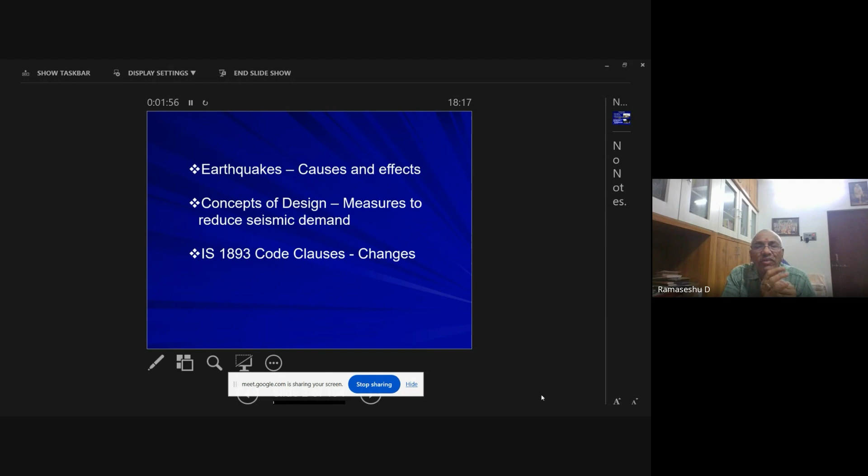So in this lecture, I am going to talk about earthquakes, their causes and effects, and some of the concepts of design, and what are the different measures to reduce the seismic demand. And also IS 1893's clauses.

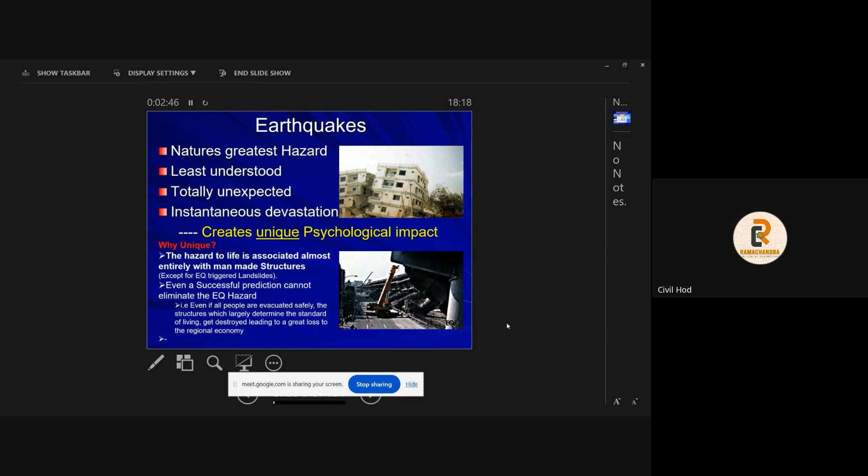Now let us see what earthquakes are. Earthquakes are nature's greatest hazard and also least understood, totally unexpected, instantaneous. They cause instantaneous devastation. Because of this they are unique, they present a unique situation, and in that sense they create a unique psychological impact. So why are these earthquakes unique, first of all?

First thing is, suppose if you are standing in an open area, you don't feel an earthquake. You may feel some earthquake, but no damage will be there. But if you are in the midst of buildings, etc., man-made construction, definitely there is going to be havoc in that particular region because of the earthquake. So that is why the hazard to life is almost associated entirely with man-made structures.

Even a successful prediction cannot eliminate the earthquake hazard. Suppose if you are able to predict the earthquake occurrence, even then it will not be able to eliminate the hazard, because even if all the people are evacuated safely, the structures which largely determine the standard of living get destroyed, leading to great loss to the national or regional economy. So that is why they are unique.

Now, if you look at small mythological aspects, there are 5 natural disasters in general. They cause devastating effects, they are the forces of nature. For example, Prithvi - we see earthquakes and landslides associated with this. Then tsunami and floods are associated with Jal. Similarly, Agni causes fire and volcanic eruptions. Vayu creates cyclones and hurricanes. Akash, lightning affects it. So all these disasters will have a profound environmental effect and human loss, and frequently incur financial loss.

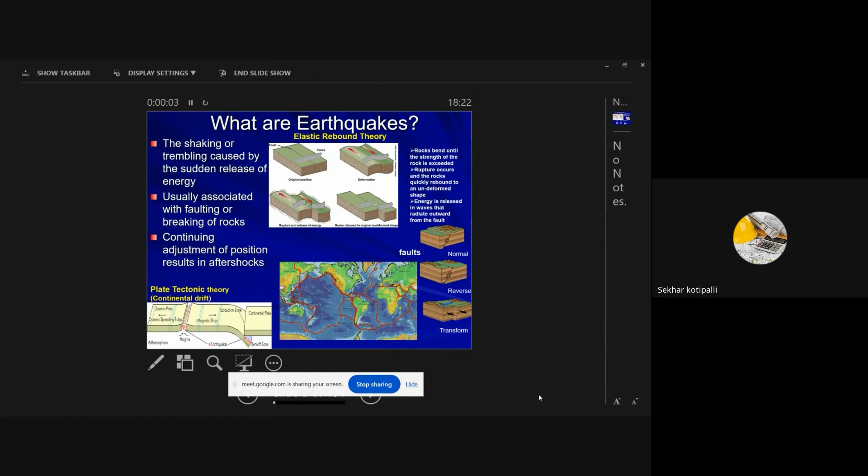As per the elastic rebound theory, these rock masses, when they break, release a large amount of energy. That energy is converted and shows up as an earthquake. So this is what the elastic rebound theory says. This may happen either due to faults or different types of natural elements in the earth.

There is another theory which is the plate tectonic theory. The entire earth is composed of different plates. It's not a continuous mass. The earth's crust is not a continuous mass; it consists of different plates. All these plates move relative to each other and try to collide with each other.

For example, India is part of the Indo-Australian plate, which tries to collide with the Eurasian plate. At that boundary where the Himalayas exist, the plates continuously collide with each other, so there is a possibility of a large number of earthquakes in that region. These are the different theories: elastic rebound theory and plate tectonic theory, also called continental drift.

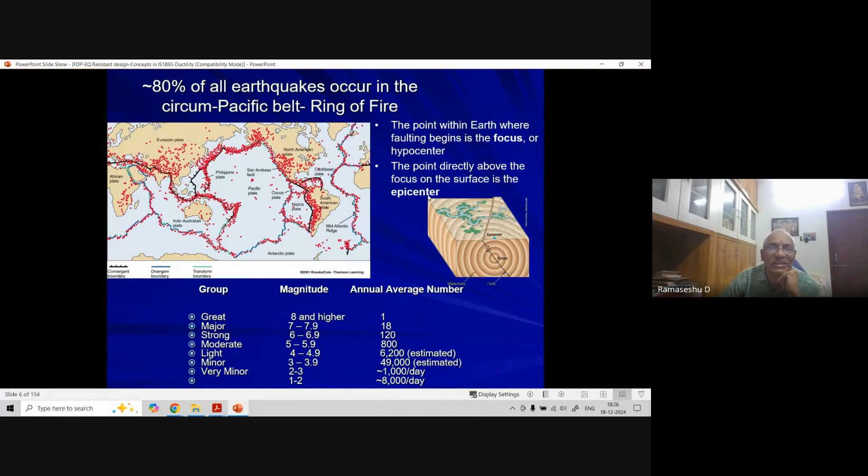Now let us see some terminology with respect to earthquakes. The terminologies are focus point and epicenter point. The focus point, or hypocenter, is the point within the earth where the faulting begins, where the disturbance actually occurs. The point directly above this focus on the surface is the epicenter. These are the general terminologies we are all aware of.

Whenever there is a disturbance at the focus point, seismic waves get generated, and these seismic waves travel long distances. There are 4 types of seismic waves: the primary wave, the secondary wave, the Love wave, and the Rayleigh wave.

The P waves, the primary waves, travel with the velocity of sound, almost 330 meters per second in air, whereas 1450 meters per second in water, and about 5000 meters per second in rocks like granite. These P waves are push and pull waves.

Secondary waves have nearly half the speed of the primary wave. That is, if the primary wave is 300 meters per second, the secondary wave will be around 150 meters per second. These secondary waves cause side-to-side movement, whereas the primary waves cause push and pull type movement.

Coming to the Love waves, they travel sideways in a horizontal plane and cause a lot of disturbance. Similarly, Rayleigh waves are elliptic or vertical, meaning some kind of circular movement takes place. Of all these primary, secondary, Love, and Rayleigh waves, the Love and Rayleigh waves cause a lot of disturbance compared to the primary and secondary waves. Primary waves cause little disturbance, but secondary waves cause a little higher disturbance.

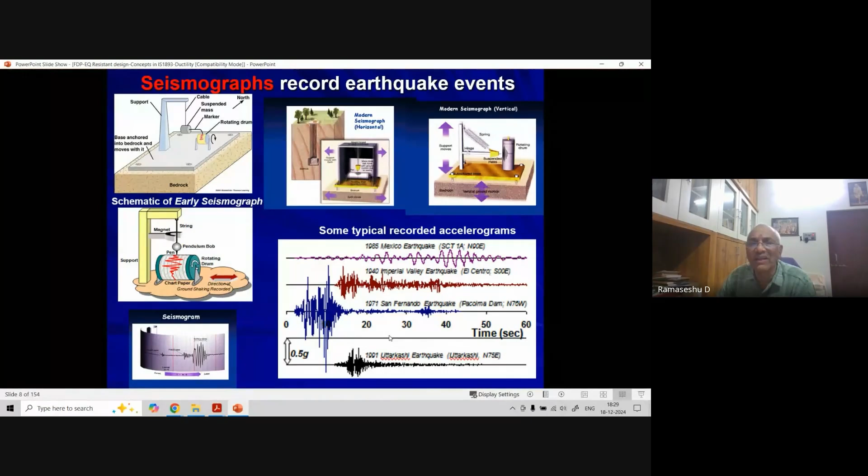Now coming to how an earthquake's epicenter is located. Suppose there is an earthquake, how are people able to locate where its epicenter is? From the seismic record, what we get is the time of arrival. Primary waves travel very fast and reach a particular point before the other waves, causing a small disturbance. Let us say that is time t1.

Then sometime later, the secondary waves arrive at that same point because they travel at a lesser speed. Let us say that is time t2. So there is a difference between these two times, t2 minus t1. If you know this gap in seconds, you can find out the distance of the focus point or epicenter.

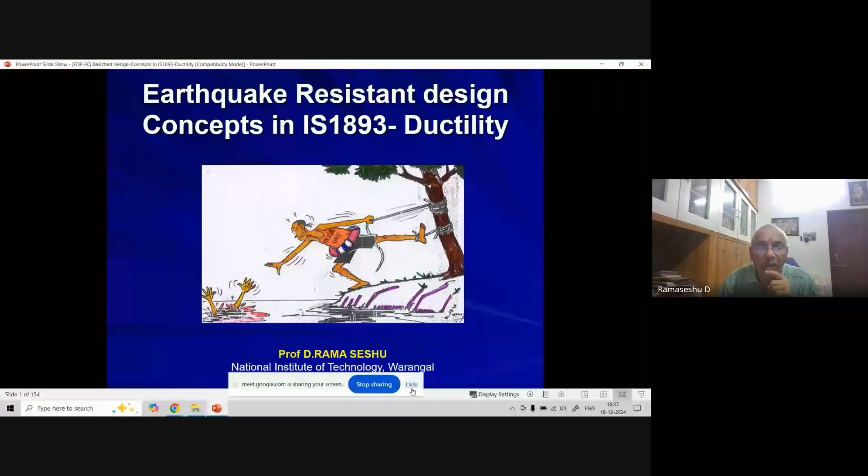Okay, are you able to see this? Yes, sir. Continue, sir. Right, okay, there was a power disturbance. Okay, right, now let us see.

There are two ways of measuring an earthquake: the intensity and the magnitude. Intensity is a qualitative measurement of an earthquake, while the magnitude gives the exact quantitative measurement. Qualitative means the amount of disturbance it causes, which determines the intensity. The magnitude is generally the same for an earthquake event at all points, whereas the intensity differs depending on the devastation or disturbance it causes.

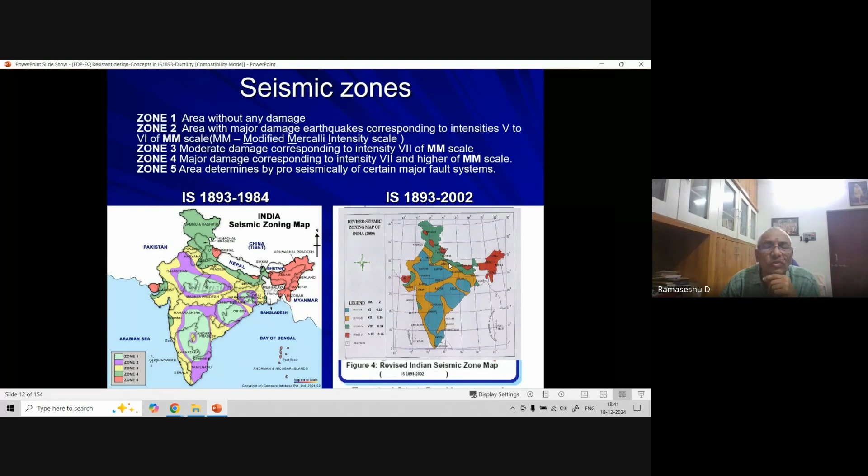Now let us see the concept of earthquake forces. Any building will have mass as well as stiffness. There is a time period related to both mass and stiffness, given by 2 pi times the square root of m by k.

If a building has lower stiffness, meaning it is flexible, the k value is smaller; tall buildings normally have smaller stiffness values. Smaller stiffness means the time period will be very large, so tall structures are longer period structures. Whereas shorter structures have more stiffness; even if the mass is more, smaller structures will have a smaller time period.

So this is the way we can understand in general the time period of the buildings. This time period is very important, because the time period is the one which decides the magnitude of the intensity of the earthquake forces.

Because we are going to use a particular graph given in IS 1893, the graph between spectral acceleration versus time period. The time period is, let us say, 0.5 seconds for a particular building. It experiences maximum spectral acceleration, almost SA by G is 2.5. What is this SA by G? The acceleration is 2.5 times the acceleration due to gravity, 2.5 G.

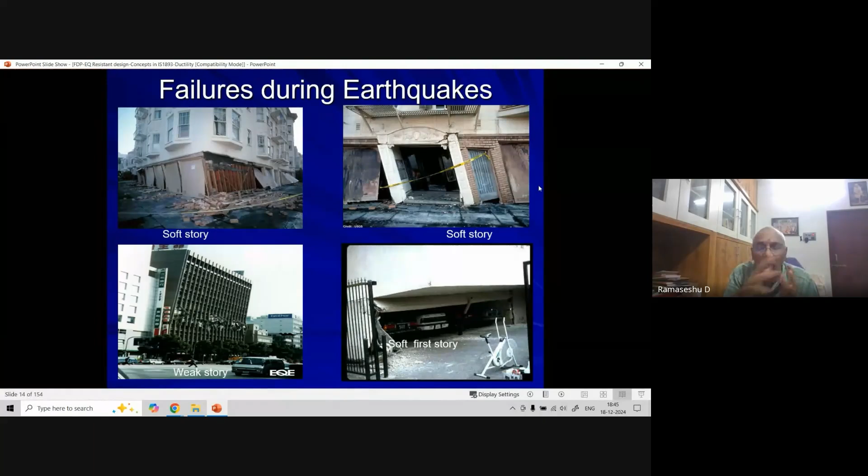We will come to this aspect. Similarly, some more failures: the building can move off the foundation, which causes failure, and columns may fail, and bending of these columns will take place.

Similarly, because of the high center of mass, there is a possibility resonance may occur. Resonance occurring means a lot of damage is going to occur. Resonance means the time period of the building matching with the period of the earthquake waves. Whenever there is a matching of these things, a lot of amplitude will take place, and because of this, a lot of disturbance will take place.

During the earthquake there can be falling objects, and coming to ground failures, there can be liquefaction. Liquefaction means almost the foundation soil behaves as if it is a liquid, so it doesn't have any shear carrying capacity, and the building will sink. That is the liquefaction effect.

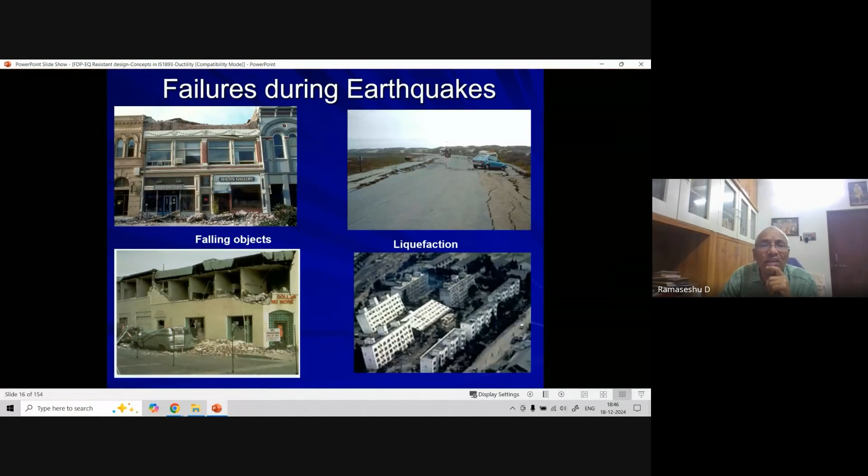There can be overturning effects, opening of faults, and damages to canal structures. There can be different types of failures: bridge failures, pipelines crossing the fault getting damaged, etc.

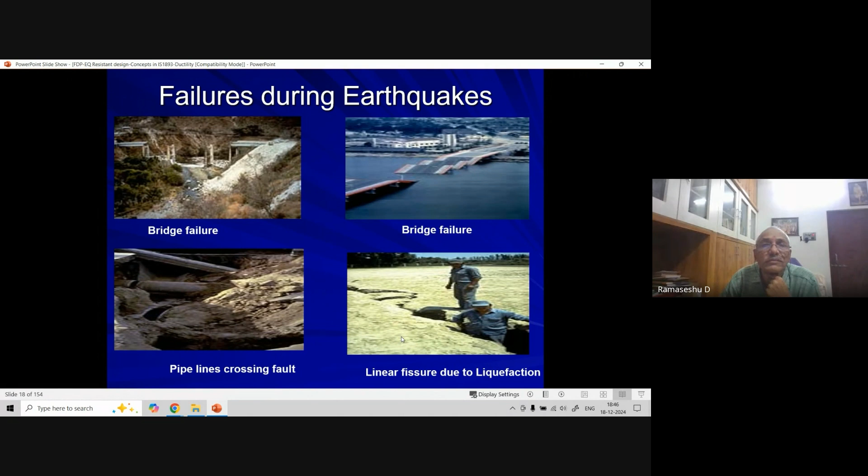Similarly, damage to tanks, RC staging, steel staging, or whatever. RC cantilever slabs in particular are the first elements to fail under earthquake forces, because in an earthquake event, if the amplitude of a normal frame is some x, the cantilevers will experience 3 to 4 times that amplitude. That is why they are the ones that fail faster.

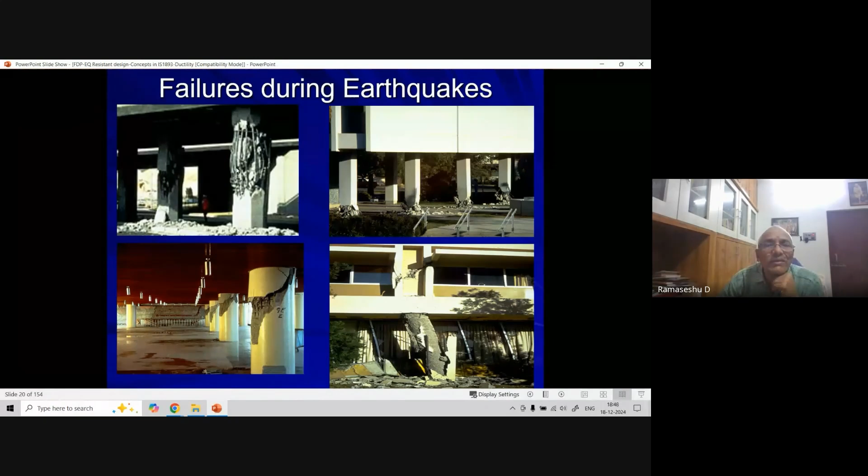Here in the first picture you can see the lateral ties, but you are not able to see any lateral ties actually; all these lateral ties got opened up, so there is no tying of the main bars because of the opening of the ties. We normally call that a confinement failure, meaning there is no confinement to the core concrete, which causes the failure. We'll discuss this confinement later.

Particularly unreinforced buildings, unreinforced masonry structures, suffer a lot. For example, infill walls or even brick masonry walls are subjected to crisscross cracking, meaning two types of cracking occur because of the cyclic movements of the ground or shaking.

Okay, so those are all some of the photographs which indicate how the failures will take place, etc.

Now coming to the concepts of design. Here the concept is very simple: the capacity shall be greater than demand. Capacity means the building capacity, whether from a stiffness point of view or strength point of view, which has to be greater than the demand. Demand means whatever earthquake forces that come. So if the capacity of the building is more than the induced earthquake forces, then the building survives. That is the concept.

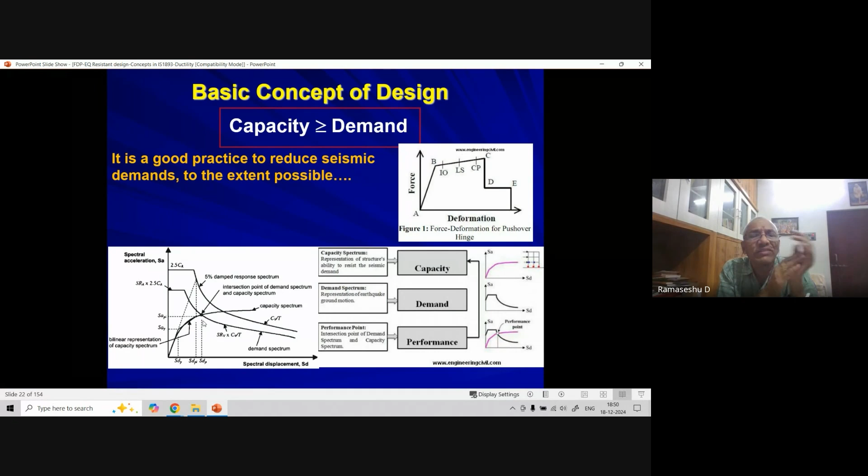So now, how to achieve these things? It's good practice to reduce the seismic demand to the extent possible. This can be done at the conceptual stage by selecting a suitable structural system. Now I am going to discuss certain measures that can reduce the seismic demand so that the structures get protected.

Here I have listed a few measures which reduce the seismic demand, starting from selecting a suitable site with favorable soil conditions, or avoiding unnecessary mass, etc. We'll discuss one by one. The first one is selecting a suitable site with favorable conditions. For example, if the selected site consists of soft soil, that means the bearing capacity is very low.

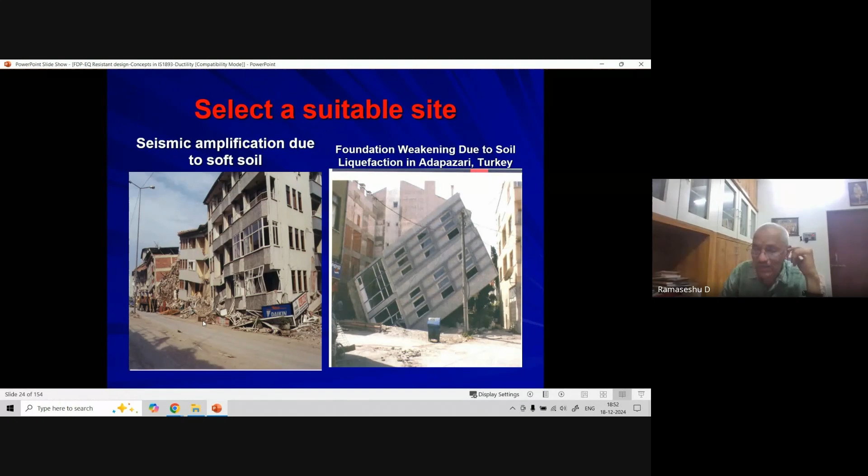The problem is whenever seismic waves travel through soft soil, they get amplified - meaning the magnitude of the displacement gets amplified. That causes a lot of disturbance to structures existing in that region, and there is a possibility of liquefaction. Liquefaction occurs wherever there is vibration or sudden movement of soil grains - they lose their one-to-one attachment and behave as if they are liquid, losing all shear strength. This causes severe settlement of the building, etc.

So selecting a suitable site is very important from the point of view of earthquakes, as they can cause overturning or failure of mat foundations. These are all the reasons for a weak site, or a site having less bearing capacity, etc. - soft soils, for example.

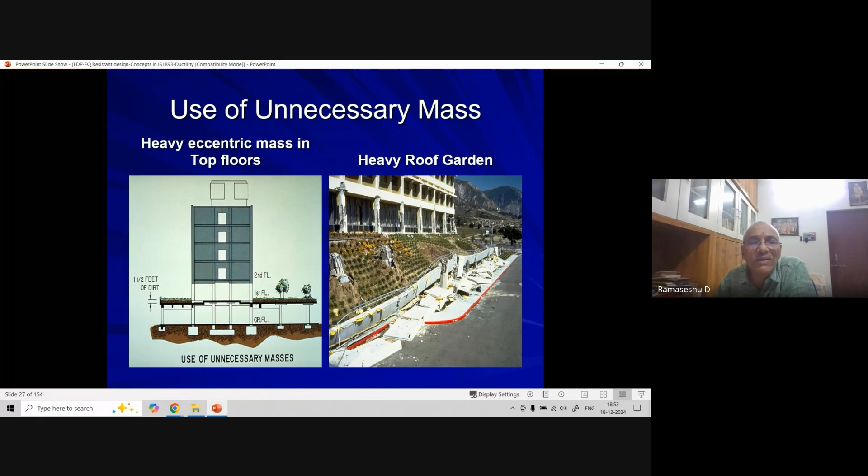Then another aspect, apart from selecting a suitable site, is to avoid using unnecessary mass. For example, you should not have a plan of the building such that there is a heavy eccentric mass located in the top floors, whereas lightweight material is in the lower floors. That causes unnecessary mass placed at the very top, which leads to a lot of forces likely to act on the building and cause its failure. Here you can see a building where, in the first floor, they had a heavy mass - a heavy roof garden was there. So in the event of an earthquake, the floor got damaged. So you should not keep unnecessary heavy mass.

Then, apart from selecting suitable soil and avoiding unnecessary mass, there is a third point: use a simple structural layout with minimum torsional effect. Simple structural layout means it should be rectangular, square, or something like that. Wherever L-shaped buildings exist, you should give a joint between the two parts so that they act independently, as independent rectangles. That is a simple structural layout. Why simple structural layout? Because wherever there is irregularity, either in the plan or in the elevation, it unnecessarily causes torsion of the building - meaning instead of simply moving in the lateral direction, the building will turn like this.

So that causes torsional irregularity. That should not happen actually.

Another thing is avoid strength and stiffness taper along the height. What is the meaning of this? There should not be much difference in strength between adjacent floors. Suppose one floor has lateral strength X, the immediate adjacent floor should have the same strength. It should not have a strength much less than this. Similarly with respect to stiffness also.

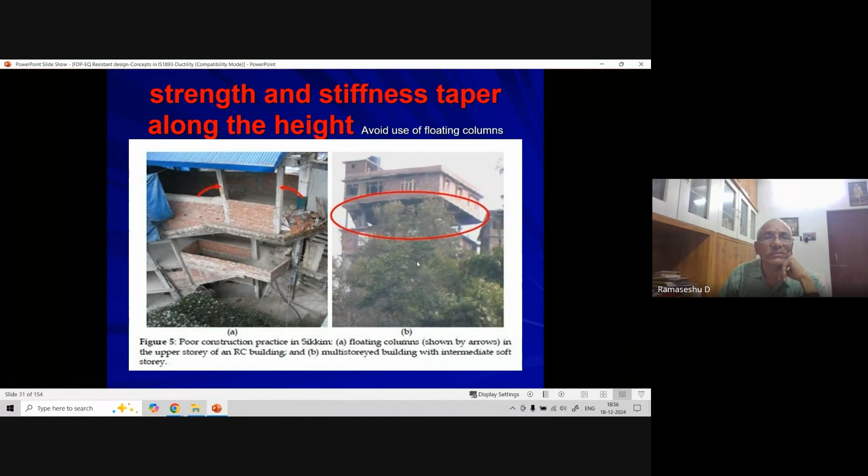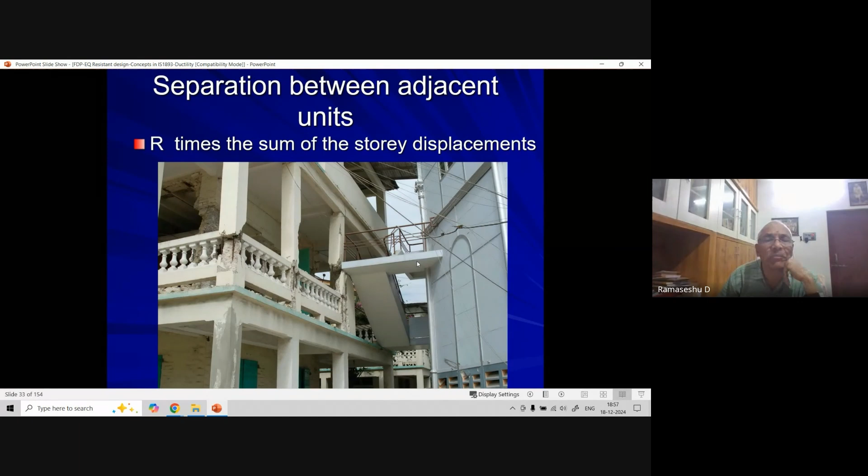That is why the code says the minimum gap between the structures is R times the sum of the story displacement. R means the response reduction factor. That should be the minimum gap you have to maintain between the buildings in order to avoid the pounding effects.

Similarly, short columns. For example, you can see here the staircase, because of the landing slab, this column height reduces. So if the column height reduces, what will happen? Of course it has to be designed properly. The reduced column height means the short column will have higher stiffness actually.

Higher stiffness columns attract more seismic forces, so they have to be designed accordingly. Any rigid element will attract more forces. That is a general principle - any rigid or stiffer elements will attract more forces from earthquakes.

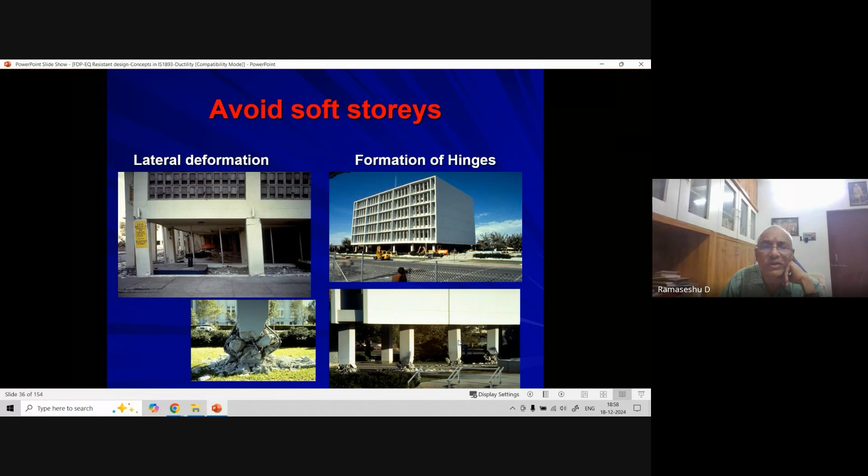Now coming to avoiding the soft stories. You have to avoid the soft stories. Soft stories cause lateral deformation, and there is a possibility of formation of hinges in the soft stories, which causes a lot of damage to the columns etc. Here you can see that particular building wherein a series of columns got damaged. This is another failure, soft story failure.

As far as possible we have to avoid soft stories, or if the soft story becomes essential because of parking purposes and we need to keep the ground floor without constructing any brick wall, in such case at least we have to take care by providing bracings or shear walls etc. We shall see this in the presentation later.

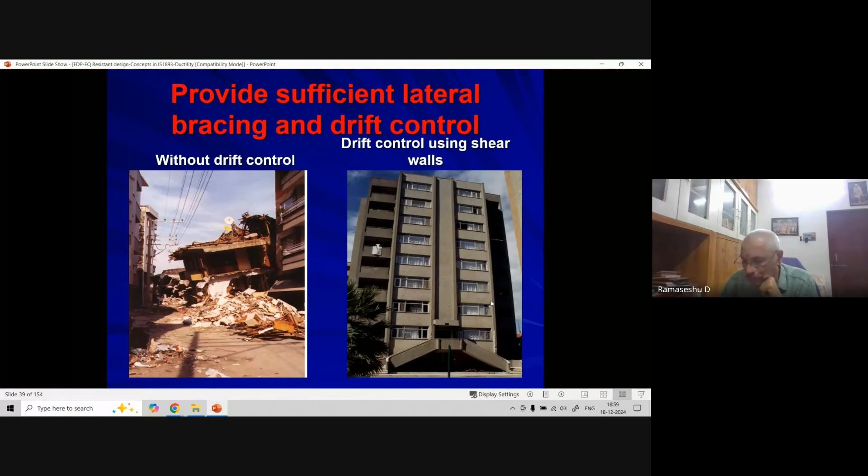Similarly, isolate the non-structural elements. Whenever non-structural elements are present, they are going to get damaged. Whenever there is lateral movement, non-structural walls, infill walls etc. get damaged heavily. That's why you have to have a separation between these non-structural and structural elements in order to avoid the damages. These are all certain measures.

So far, we have discussed certain measures that have to be taken to avoid the seismic demand, to reduce the seismic demand actually.

Now coming to the seismic design requirement, nowadays we are following the capacity design method. What is this capacity design? In this method, certain selected elements of a structure, either beam or column, at critical places, critical elements, are designed in such a way that they remain elastic, whereas the other parts of the beams go into the plastic regions. So that is the general principle of capacity design.

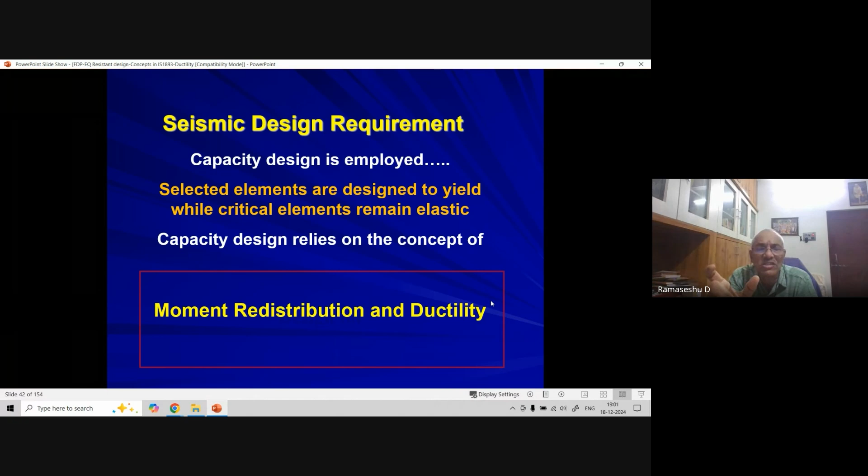But this capacity design heavily relies on the concept of moment redistribution and ductility concept. Now let us see what is this moment redistribution.

This is a very important concept in the design of structures, moment redistribution. Normally if you analyze a frame, let us say a beam, under linear response conditions, it shows up some bending moment diagram.

But what happens if you go on increasing the load to ultimate? The beam will act such that there is a possibility of hinges taking place. Plastic hinges will take place because of the non-linear stress strain behavior of the constituent materials. Because of this, plastic hinges may take place at certain locations, not all locations.

Now, the effect of this is that the formation of plastic hinges will transform an indeterminate structure towards the determinate. For example, a fixed beam subjected to UDL - if you keep increasing the UDL, the fixed supports will experience heavy bending moment. Whenever this bending moment reaches the capacity of that section, we call that the plastic moment, MP. After that, there is no increase in moment at that particular point.

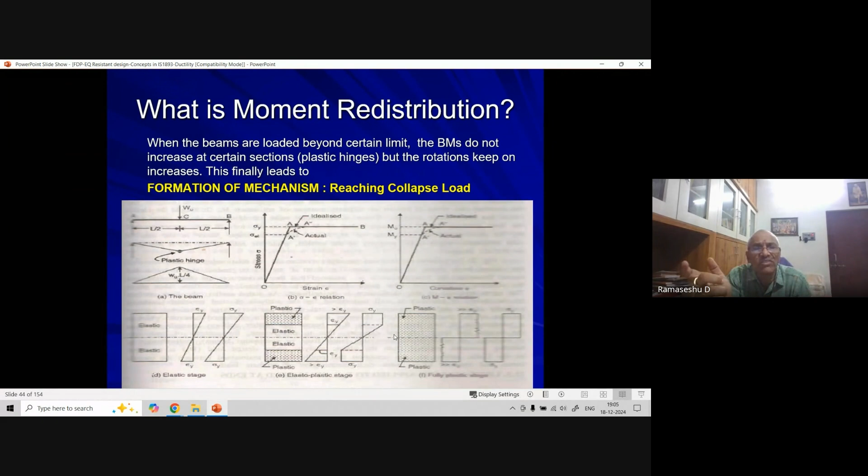This is called the redistribution of the moments. As far as redistribution of moments is concerned, the IS code has certain limitations. For example, if you see clause number 37.1.1, the neutral axis depth ratio x by d should be less than 0.6 minus delta m by 100.

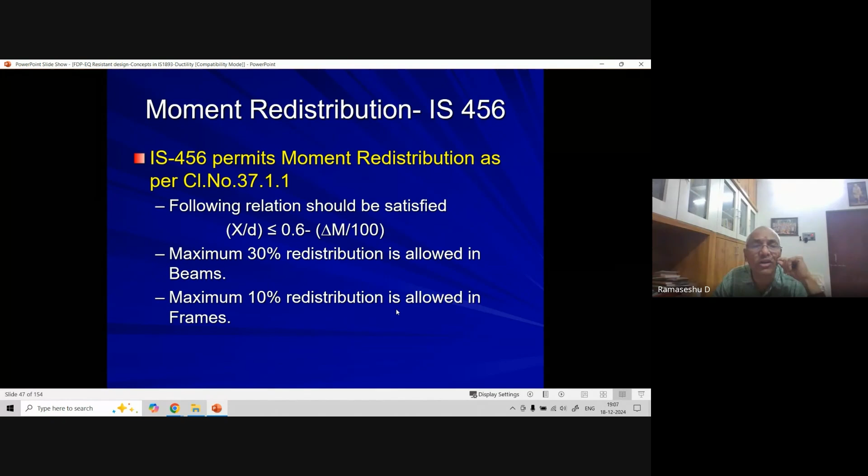Now coming to the limitations of moment redistribution, particularly with respect to RC sections. RC sections have a limited rotation capacity. How do we increase this rotation capacity in order to have more redistribution of moments? Rotation capacity depends upon ductility of RC sections. What is ductility? Let us see a few aspects of this ductility.

Before that, I have a small question. Suppose I ask you whether you want an earthquake resistant building or an earthquake proof building. What is the difference? Earthquake proof means no damage. But this concept is incorrect.

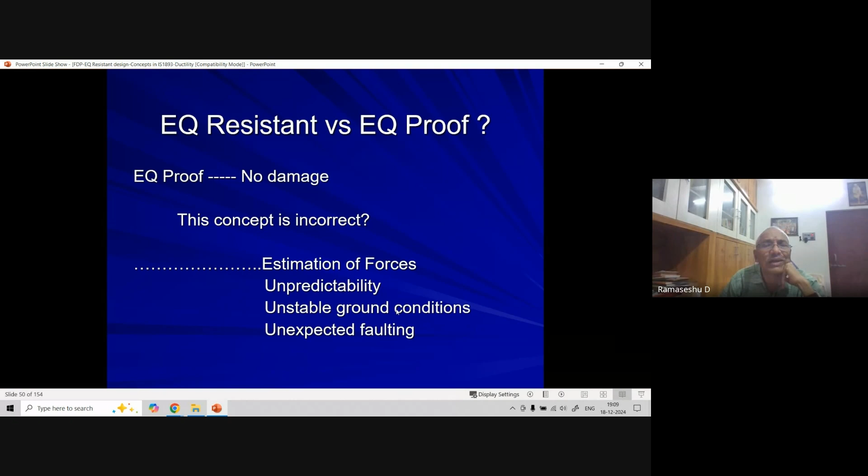Why is it incorrect? Because we cannot estimate the forces correctly. Nobody can predict exactly what earthquake force is likely to happen because of the uncertainty. Of course we have some methods to estimate the forces, but how far are these methods reliable? There is uncertainty in force estimation, unpredictability of earthquakes, unstable ground conditions, unexpected faulting of the ground, etc. All this gives an uncertain situation. That is why an earthquake proof building, one with no damage, is not possible, and it's not a correct concept. We have to accept some damage, meaning that in the event of an earthquake there will be some damage that needs to be corrected later. That is why the code suggests only earthquake resistant buildings, not earthquake proof buildings.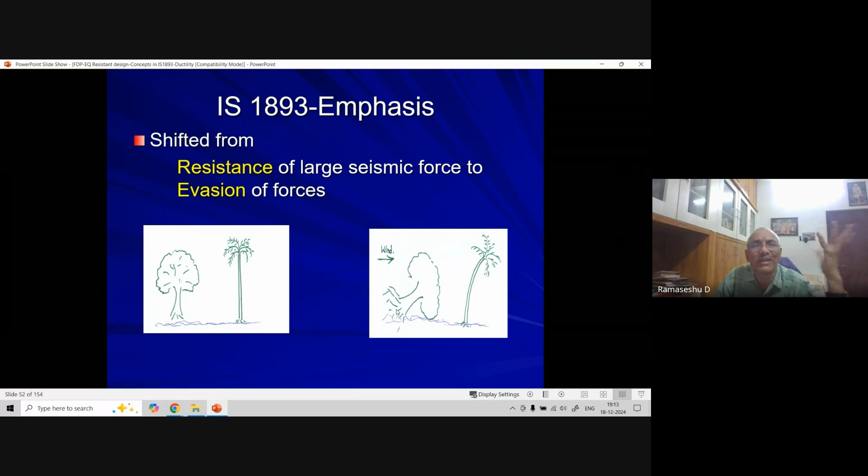Then how do we do this? The saying is very simple - instead of resisting, you evade the situation. But how to bring this concept into structures? We can introduce this by encouraging structural forms possessing ductility, not only strength but ductility. If the structure has ductility, under gravity loads it behaves as if rigid, but under extreme forces it behaves as if flexible. This is possible only when the structure has sufficient ductility.

What is this ductility? Before that, there are two distinct designs of buildings that result in different earthquake performances. One design goes for strong column, weak beam; another goes for weak column, strong beam. In case of strong column, weak beams, because the beams are weak, most plastic hinges form only in beams, not columns - only at the ground level is there a possibility of column hinges. Whereas in weak column, strong beams, there is no possibility of hinges in the beams - the hinges will form only in columns.

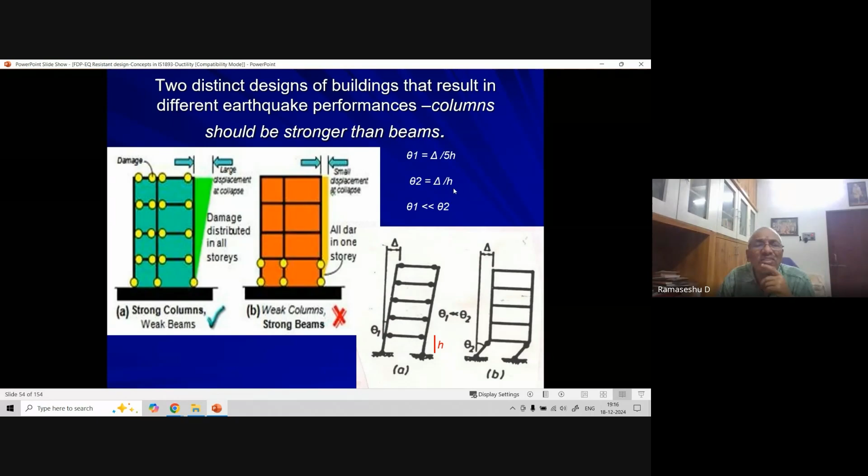Whereas in the second case, where weak column and strong beam is there, for the same delta, theta 2 simply becomes delta by h - meaning the denominator has reduced. In the first case it was the total height of the building, whereas in the second case it's only the floor height. So theta 2 will be much higher than theta 1, meaning the rotation capacity required in the second case is much higher. Since concrete cannot undergo that much rotation capacity, we prefer the first type of design - strong column, weak beam. This is the concept the code prefers.

Because of this, the code also prescribes certain performance objectives under different intensities of ground shaking. Performance objectives range from low repairable damage to collapse prevention. For example, in minor shaking there can be low repairable damage, whereas in strong shaking there can be heavy damage, but the structure should not collapse. These are the performance objectives the code prescribes.

For example, if there is an ordinary building, whenever there is a frequent earthquake, the ordinary building has to be operational - meaning it should not collapse. For example, if you see the rarest type of earthquakes, very heavy earthquakes, the ordinary building reaches the near-collapse region.

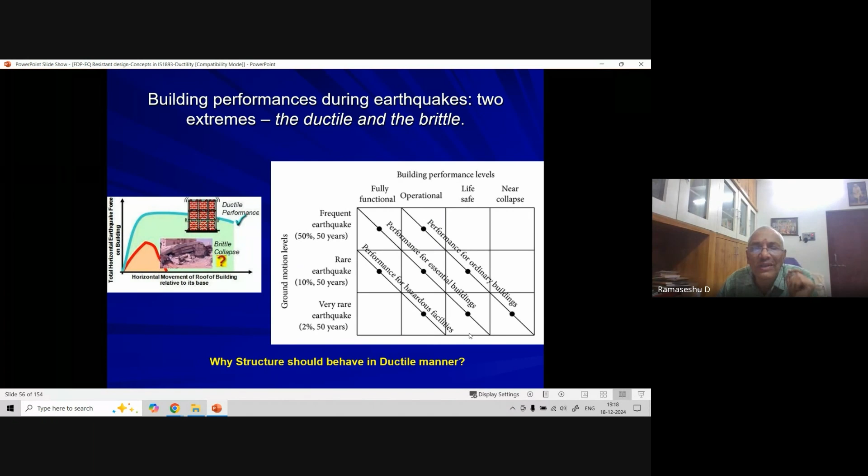This is the point, near collapse region. The performance for ordinary buildings transfers from operational performance level to that of near collapse region. Similarly, for hazardous facilities, meaning those whose failure causes a lot of havoc, we should not push such buildings till near collapse. These buildings should remain operational even in the event of rarest of rare earthquakes. That is the performance objective with which the buildings are designed. So to achieve these performance objectives, ductility is very essential.

Providing ductility in a structure - now let us see what ductility actually gives. Ductility assists the structure in providing robustness. Second, it gives warning of the incipient collapse. Third, it enables statically indeterminate structures to go into redistribution. Fourth, when there is ductility in a structure, it enables major distortions to be accommodated and most of the energy gets absorbed in the structure. This is the advantage of having ductility: robustness, warning, redistribution, and energy absorption. These are the four things ductility will provide.

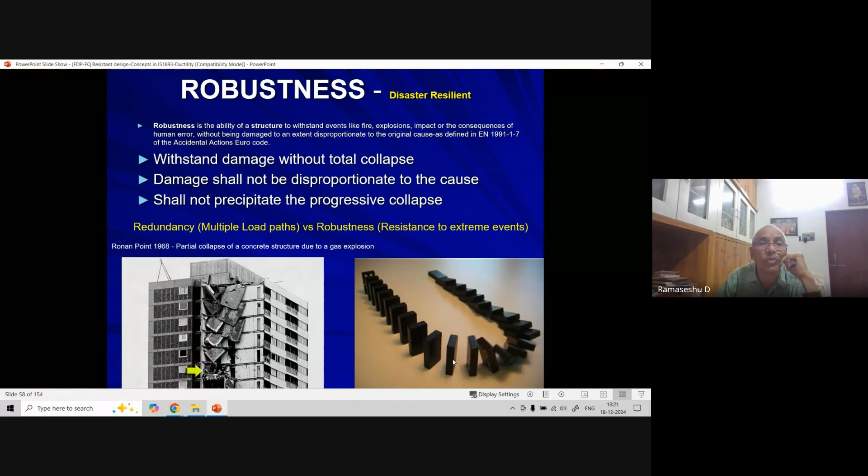If there are more alternate load paths available, then the structure is said to be more robust. For example, in our childhood days, we used to play by arranging matchboxes or a pack of cards like this. If you disturb one part, it causes the collapse of the entire system of the pack of cards - a small disturbance at one place causing the collapse of the entire system. That means such a system is not considered robust. So what we understand by robustness is that it should have different load paths, multiple load paths, redundancy in the structure.

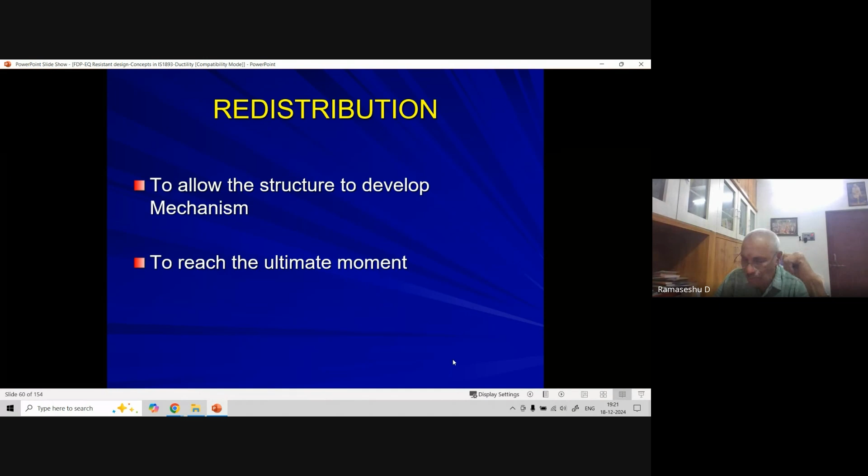Next is warning. This can occur in the form of development of cracks, crushing, etc. So this warning has to be there. Then similarly, redistribution - this is what we have discussed - allows the structure to develop the mechanism to reach the ultimate moment. Before reaching the mechanism, it should not collapse. Then energy absorption is the one which happens without significant loss of resistance.

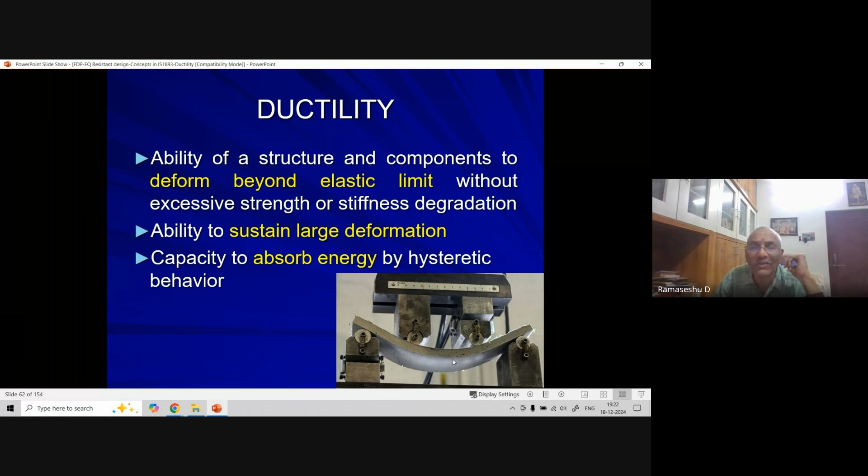So by definition, ductility is the ability of a structure and its components to deform beyond the elastic limit without excessive strength or stiffness degradation. By another definition, it is the ability to sustain large deformation or capacity to absorb energy by hysteretic behavior. Here, just look at the hysteretic behavior - what do you mean by this hysteretic behavior? These are the hysteretic behaviors of a particular joint or particular structure.

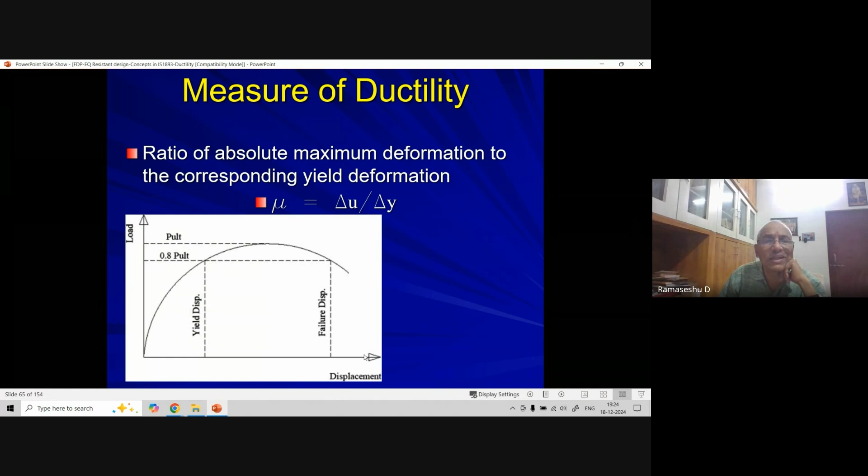Similarly, ultimate strain to yield strain is also considered as strain ductility. There are different types of ductility. One is structural ductility - if you are measuring with respect to displacement, it is called structural ductility. If you are measuring with respect to the material or the strains, it is called strain ductility or material ductility.

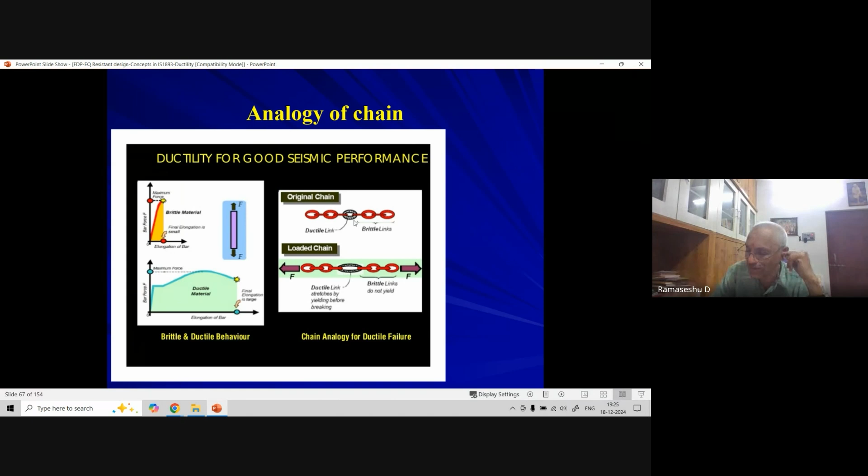With respect to this ductility, there is a concept called chain analogy. For example, there is a chain with different links. All the red color links are brittle links, and the one shown hatched is a ductile link. It is not necessary that if you want to make the chain ductile, you replace all the links with ductile links. Even if you change just one link to a ductile link, the entire chain will behave as if it is ductile. That is why, similarly, it is not necessary to have ductile detailing in the entire structure. If you have ductile detailing only at critical points, that is sufficient to make the entire structure ductile.

This is also defined with respect to curvatures, phi u by phi y - that's another definition, for sections. This is the behavior of a particular section having a low ductility class, DCL - ductility class low. Similarly DCM means ductility class medium, and DCH means ductility class high. This is the behavior shown in either force-deformation curves or moment-rotation curves, etc.

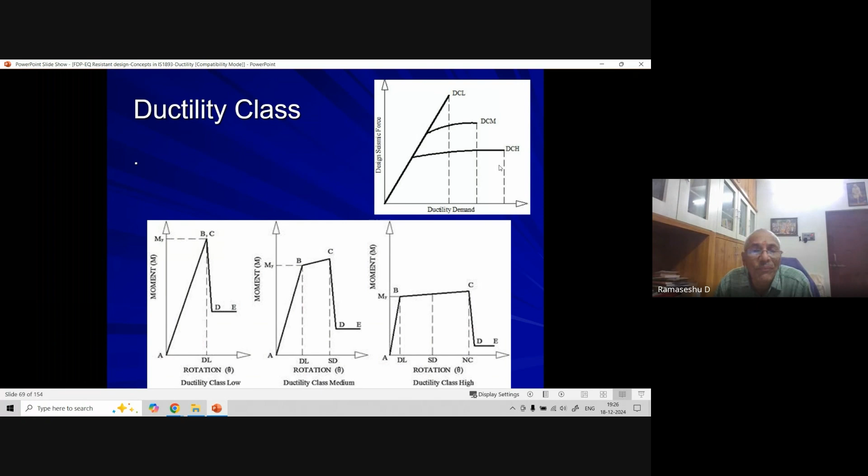What are the points that affect ductility? One is the level of axial force - when there is more axial force, there is a reduction in ductility. If you increase the compression strength of concrete, it increases ductility. If you increase the strength of steel, say instead of going for 500, going for 600 steel, there is a slight reduction in ductility. Similarly, if you increase the ultimate strain capacity of concrete, it increases ductility. So the fourth point is actually a research topic - how we can increase the ultimate strain capability of concrete so that ductility can be increased. This is being researched a lot even today, how to increase the strain capability of concrete, because that is going to increase the ductility.

Here in this figure, you can see the formation of hinges in case of strong column-weak beam, and weak column cases.

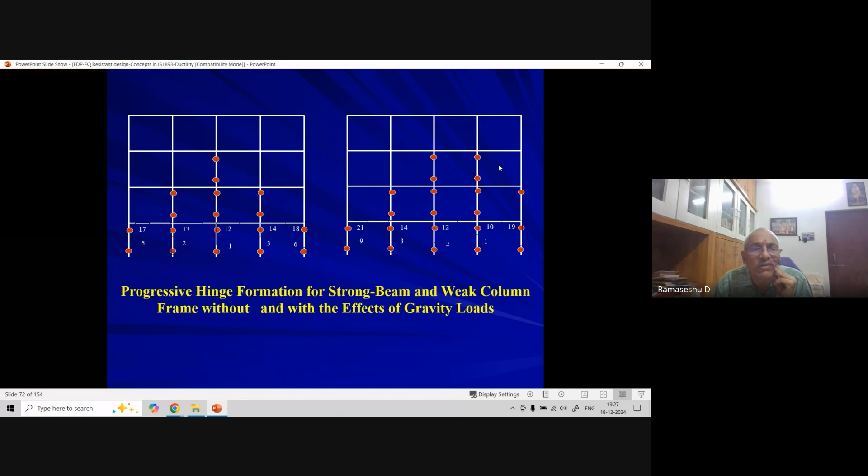Now, we have discussed already - from the point of view of ductility, the strength and ductility has to be balanced in a particular structure. How to achieve this ductility?

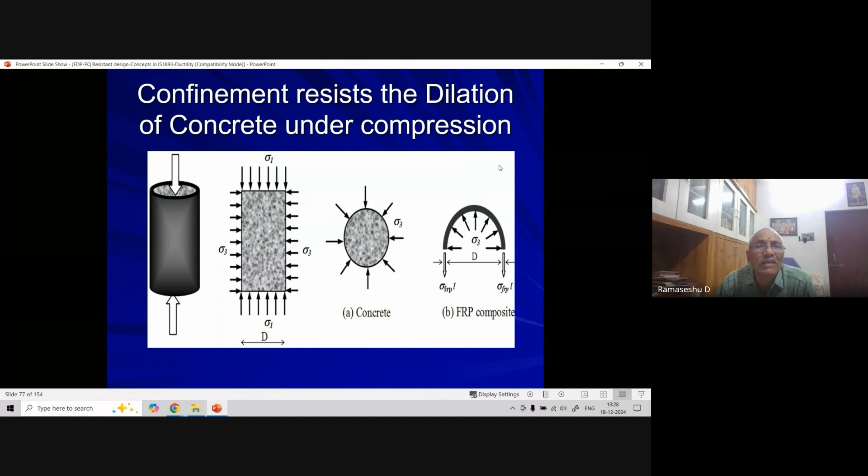Ductility is achieved by having a confinement action. Confinement means, suppose if a cylinder is there, whenever you apply an axial load, because of the Poisson's effect, the concrete tries to move in a lateral direction. Whenever you press it, the concrete will move laterally. But if you confine that particular cylinder either by means of ties, or FRP, whatever it may be, then the lateral displacements are very less. That means that particular cylinder is said to be confined - this is what confining action means. Confining action increases the ductility.

There are different ways of putting the confinement. The conventional way of putting confinement is by using stirrups, ties, hooks, spirals, etc. The non-conventional way of achieving confinement is either by ferrocement confinement or FRP confinement. Of course, fluid pressure confinement is not a practical one, but it also provides confinement.

Confinement can be at a discrete level or continuous. Discrete confinement means, for example, if you provide stirrups or ties, between the ties the concrete is not confined - that is why it's called discrete confinement. Whereas continuous confinement means if you provide FRP or ferrocement jacketing type, that provides a continuous level of confinement. Similarly, confinement can be passive or active. Active confinement is not practical actually, but passive confinement you can have in the form of stirrups, hoops, etc.

Similarly, confinement can be low strength, low level of confinement, or high strength, high level of confinement. Normally, high strength confinement is possible because of the use of FRP. There are different confinement categories, and this is being researched actually.

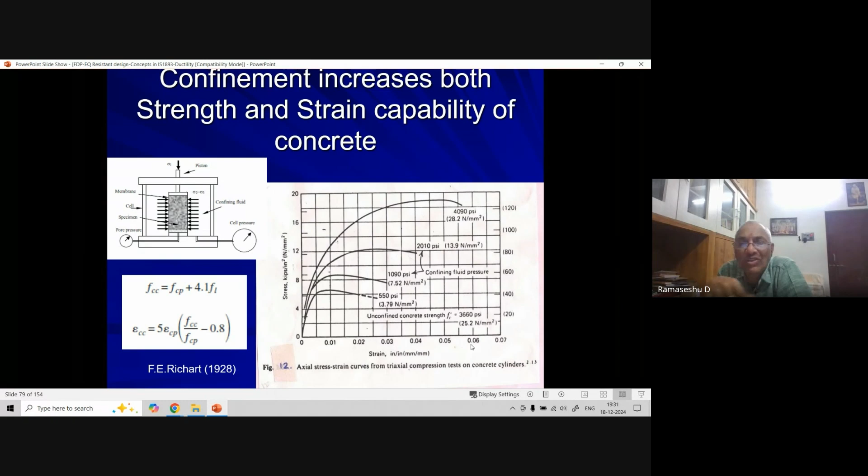In 1928, F.E. Richart came out with the concept of confinement. He applied a fluid confinement and showed that the concrete strain capability could reach a strain of 0.06. Whereas today, the stress block we use has a maximum strain of 0.0035 for concrete. But with proper level of confinement, the strain capacity of concrete can be 0.06, which is very high compared to 0.0035. That is the confinement level that we can have.

These are all the parameters which affect the confinement. This is the confinement of square versus circular sections. Normally, circular sections will have better confinement than square sections. Similarly, the effect of spacing of the ties or stirrups will have an effect on the confinement. That's natural.

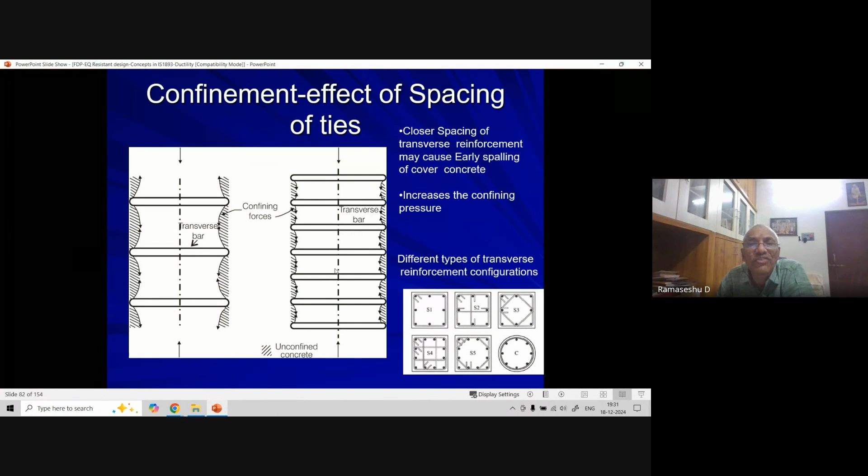Advantages of confinement: it increases both strength and ductility, and improves rotation capacity, etc. Okay, now let us see.

I'll try to close this in a very short span of time. What are the ductility measures in IS codes? How can ductility be provided? In the design, we can have some ductility by following certain clauses. In the detailing also, there are clauses to enhance ductility. For design purpose, we use IS 456-2000 code of practice. In detailing, we use IS 13920 code of practice.

As far as IS 456 is concerned, there are certain clauses by which we are unknowingly putting in ductility. For example, restricting the neutral axis depth, percentage redistribution. We will not allow the neutral axis depth to go over and above the maximum depth of neutral axis in the limit state method. That is, indirectly we are restricting the neutral axis depth, providing ductility.

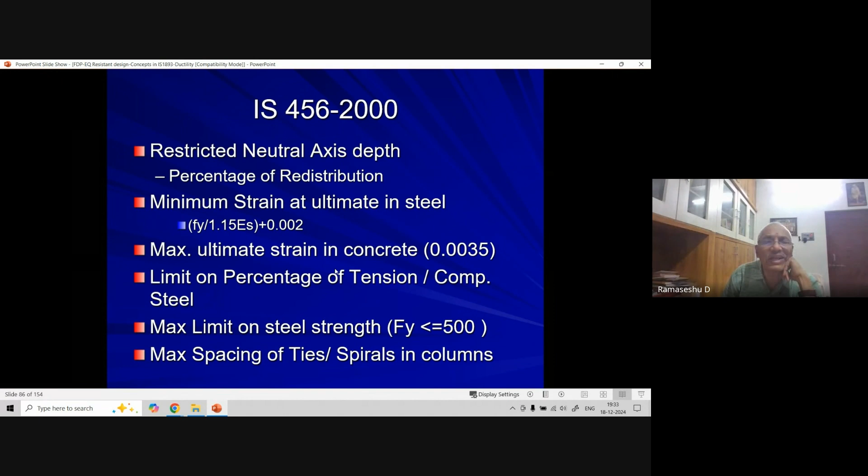Similarly, in the assumptions, you might have seen the minimum strain at ultimate, that is Fy by 1.15 ES plus 0.002. That is meant for providing ductility by having a minimum strain at ultimate condition. Similarly, maximum ultimate strain is 0.0035. Then there are limits on percentage tension steel, percentage compression steel, maximum limit on steel strength, maximum spacing of the ties and spirals. All these things are indirect clauses that enhance the ductility of the system.

Similarly, in 13920 there are certain clauses. The stress under axial loading shall not exceed 0.1 FCK. Similarly, B by D ratio, width to depth ratio, should not be less than 0.3. B shall not be less than 200 mm, D shall not be more than 1/4 of the clear span. So there are certain clauses which will automatically provide ductility in the system.

Similarly, if you look at the provision of ties or stirrups, the 135-degree bend at the closing of the link is very, very essential. Why? Because in case of extreme events, the tie or stirrup is subjected to tension forces. Because of that, the link will open up, and if the link opens up, the confinement is lost. That is why we have to go for a 135-degree bend.

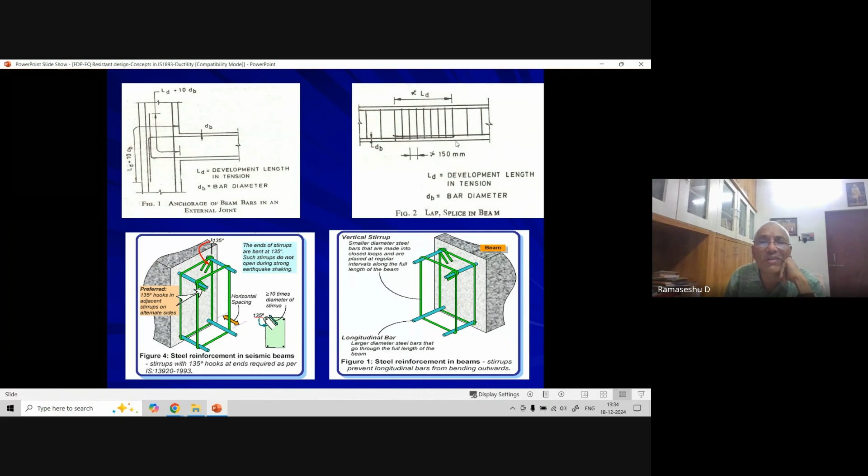Similarly, spacing of the ties or stirrups at the overlapping locations - these are all clauses which indirectly help us provide ductility in the system. These things you can find in earthquake tips or in IS 13920 code of practice, which you can read for yourself. I'll just go through these slides.

There are certain popular earthquake resistant techniques. The use of shear walls is one of the popular earthquake resistant techniques. The function of the shear wall is to maintain the connection for uplift resistance and sliding resistance. Because of this, there is stiffness gets increased, which helps in controlling the side sway. Shear walls in most buildings nowadays - people are going for shear walls to provide earthquake resistance measures. As far as the shear wall is concerned, you have to have shear walls in symmetrical positions. Don't have shear walls in unsymmetrical positions, as that gives poor resistance to earthquake forces.

Similarly, use of bracings. If a building is already constructed, one way to make it earthquake resistant is by providing bracings. That's a better option actually. There are different types of bracings: diagonal, cross bracings, chevron bracing which is triangular type bracing, or eccentric type bracing section. All these bracings will enhance or resist the lateral side sway.

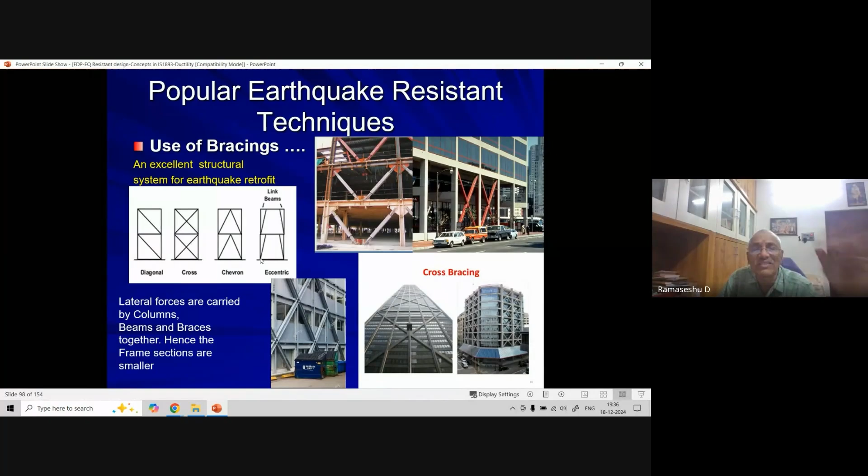Similarly, use of seismic dampers can provide earthquake resistance in a building. There are different types of dampers: viscous, friction dampers, yielding dampers, and viscoelastic dampers. Similarly, there is use of tuned mass dampers. In very large buildings, particularly, they prefer to go for a tuned mass damper. A tuned mass damper is nothing but a simple pendulum type of thing, where a very heavy mass is put in a flexible arrangement.

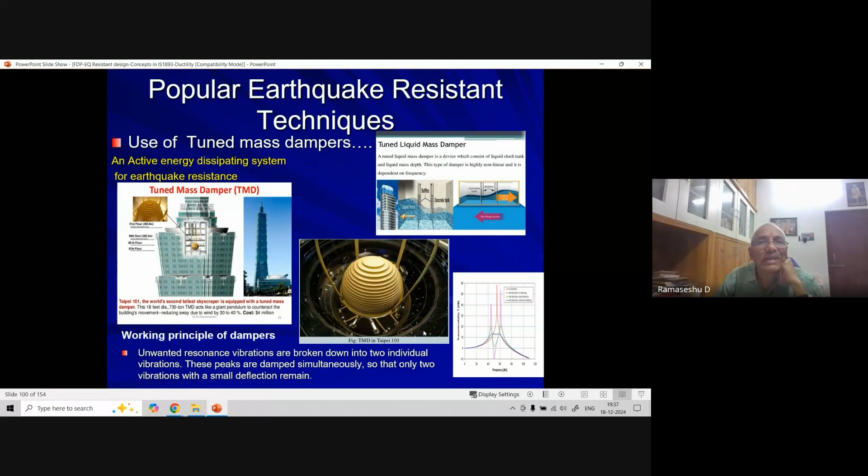So these are all the popular earthquake resistant techniques: applying reinforcing bands, use of lightweight materials, and base isolators. This is another technique which reduces the intensity of vibrations in a building. Base isolators were first used in India in the Bhuj Hospital building, after the 2001 earthquake.

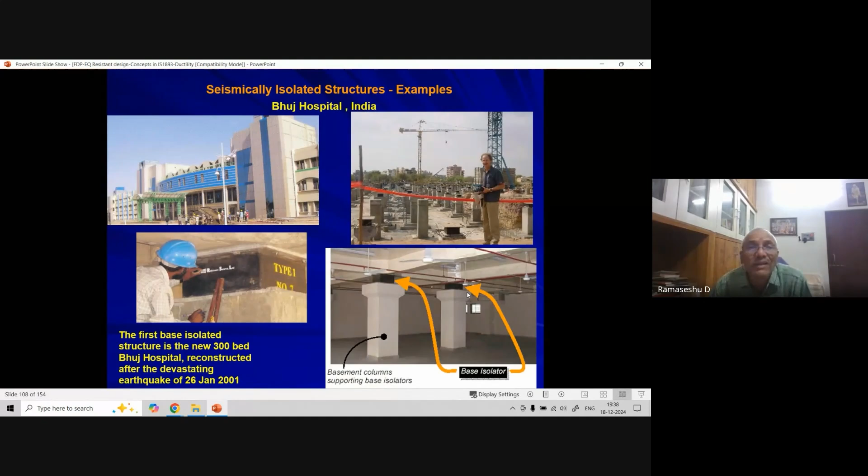Okay, with this I'll close. If you have any small questions, we can ask. Thank you, sir. Thank you for your excellent and informative session. Now I request the Head of the Civil Engineering Department, Dr. K. Sundarkumar sir, to speak a few words regarding the session. Yeah, there is one small thing. Just a minute, okay.

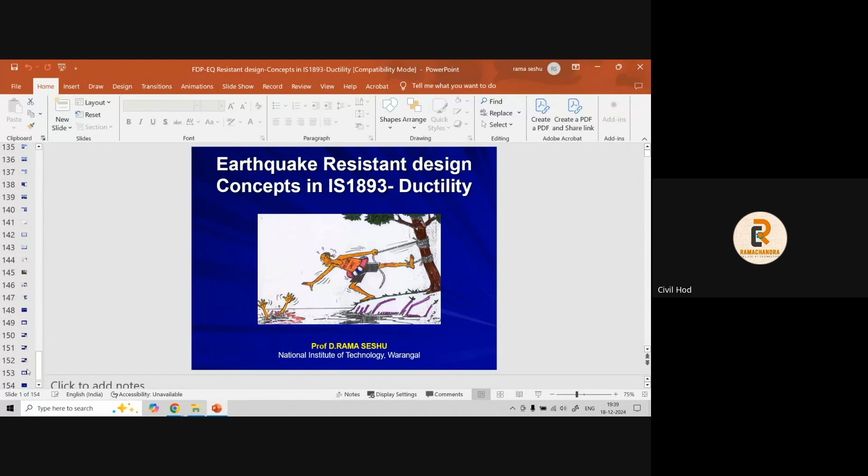At the starting point, I have shown this particular figure. What do you understand from this figure? It is self-explanatory. This is the multiple ways of defense. The first is a determinate kind of defense. Number two is an indeterminate type of defense. Number three is a ductile way of defense. So this is what they explain for that.

Okay, thank you sir. Respected Ramaseshu Garu, Professor of NIT Warangal.

We have had a very informative and interesting session, very much connected to the theme of today's program, the FDP on disaster risk reduction. Definitely this ductile nature of design will reduce the risk in the course of earthquakes and all. Very nice explanation sir, we gained a lot of knowledge through your presentation. All the slides are very much interesting, and we will keep these things on the YouTube channel for further usage by the participants, for later use.

Okay, one or two questions sir. These P waves, S waves, these different waves, where do they occur sir? Any criteria based on plates or tectonic plates and all, or do they occur everywhere? Any earthquake produces all these types of waves. No predominant waves. Each wave will have a different effect, and each wave travels with a different speed, particularly the primary and secondary waves. Primary waves may not cause a lot of damage, whereas the other waves, secondary waves, Love and Rayleigh waves, they cause a lot of damage.

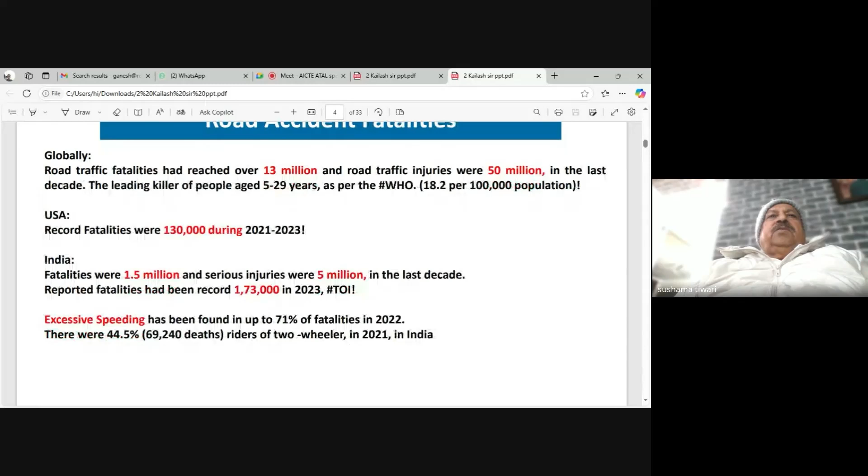Just to start with the figures, globally about 1.3 million people die in one year, and most of them were aged 5 to 29. In the USA, which is a highly developed country, 130,000 people died. In India, there were 1.5 million fatalities and serious injuries, about 5 million.

This figure has been corrected now. It is not 173,000, it is 178,000. And excessive speeding has been the main reason for the fatalities. Next, please.

So to reduce and prevent those fatalities, because engineers believe prevention is better than cure, what can we do? First, we should treat this as a system. Road safety is a shared responsibility, not only of one organization or one department.

So the safe system approach started about 30 years ago in Sweden, and similarly the sustainable safety theory in Netherlands. They started this concept, and with that they identified what we call the pillars or interventions, where if we take action on those interventions, we can prevent road crashes and associated casualties.

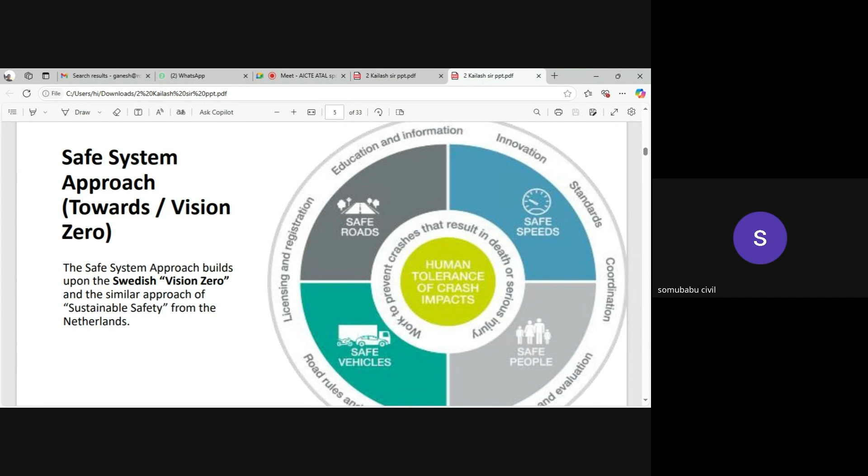There's black spot improvement, which is a reactive approach. You have to collect a lot of data, then identify the black spots, and then do the remedial measures. Again, depending on budget and priority, only limited black spots can be improved. Next, please.

The United Nations started the Decade of Action, and they strongly recommended that we should follow the safe system approach. UN Decade of Action 1 was 2011 to 2020, and the second one is continuing, 2021 to 2030. But unfortunately, because of lack of coordination, when the UN adopted the safe system approach, they missed or forgot safe speed. The importance of speed has been neglected in the second Decade of Action also.

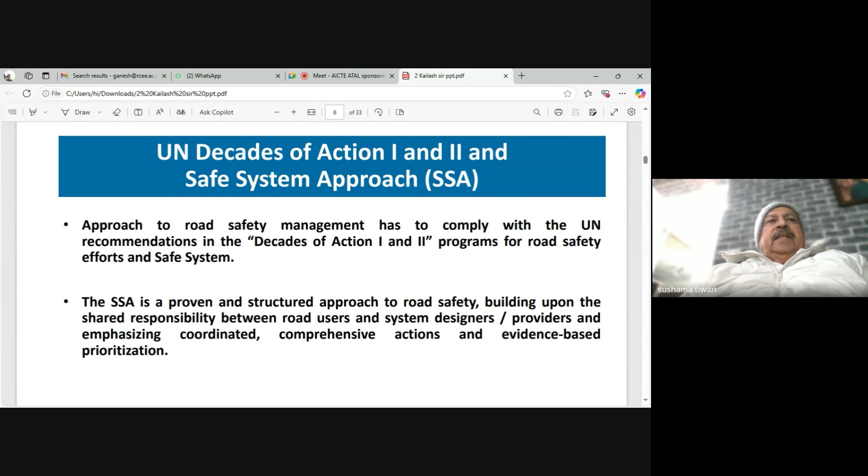So these were the first 5 pillars, and it was road safety management, and that included also the institutional strengthening and capacity building. And unfortunately, that has been totally missed in most of those organizations in India. So hardly will you find road safety engineers in India, and hardly any college, university, institute or academy offering any diploma, degree or postgraduate degree exclusively in road safety. So we have a drastic shortage of qualified professionals.

We could solve the problem of COVID-19 because we had good numbers of doctors and nurses, plus we had developed the vaccine. So these are just like 5 vaccines where we have to take care of. We have to actually take action on these interventions.

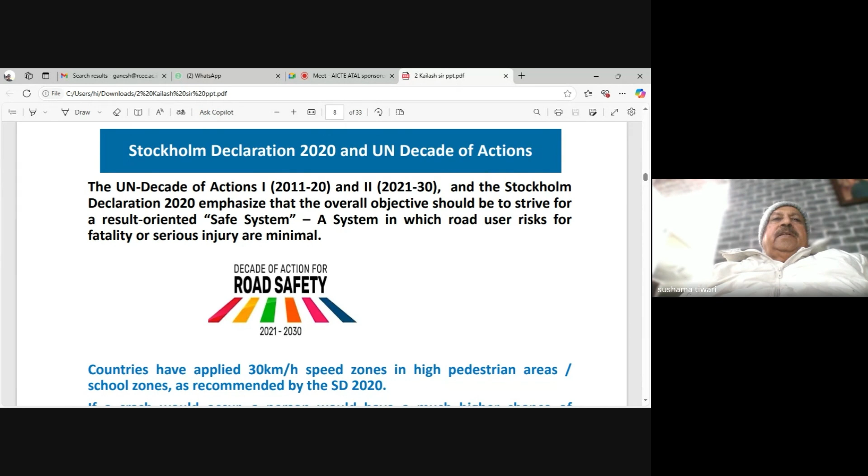And I was lucky that in Kerala itself, in 2004 and 2005, at 5 schools, I could introduce that 30 kilometer per hour speed limit with fluorescent signs.

The target they have agreed is that we should reduce, because the first Decade of Action was a total failure—they couldn't achieve the targets they had mentioned. So they came out with the Decade of Action second, and by 2030, we will have 50% reduced KSI, killed or serious injured, or FSI, fatality and serious injured. Then by 2050, we will have zero fatalities and serious injuries. That is why it is called Vision Zero, which is possible because Oslo in Norway, in the last 2 years, had zero fatalities.

I was in charge in Canberra in 2000, and we did a lot of measures. First time we introduced in Australia that on collector streets, 50 kilometers per hour, and on school zones, 30 kilometers per hour, and on all roads entering Canberra, 80 kilometer per hour speed. Plus, first time we purchased 6 radars to monitor the speed. The result was that from 20 fatalities per year, with a population of 5 lakhs, it reduced to 2 fatalities per year. So it is possible if we take preventive measures.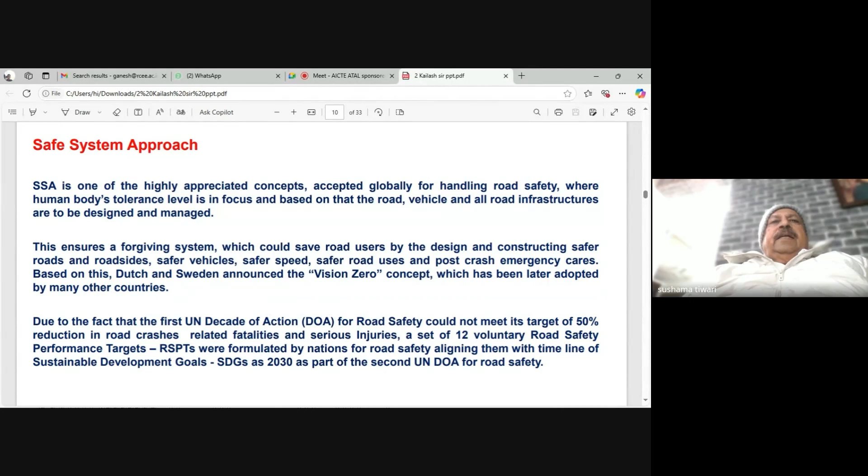This is the description, you can go through the notes. Basically it mentions that there are voluntary targets, and it has been agreed upon that all new roads have to be audited properly and should have a 3-star level. All old or existing roads should also have a 3-star rating, and with that we can improve safety. Star means there are attributes in the design and in the operation.

So what is the safe system approach? The first thing is road safety is a shared responsibility. It's not only the police responsibility, or the professor's responsibility, or the education department, health department, or RTO responsibility. It is shared, where all organizations have to work together and solve the problems. As I mentioned, we established the National Road Safety Authority in Kerala, Gujarat, Karnataka, Telangana—the idea was that organizations would sit together and work out what can be done.

Second, most important thing: the human body can only withstand limited forces in a crash before this results in a fatality or serious injury. We have limitations, a limited tolerance level. If we are struck with higher forces, then either we will die or we will have a very serious injury. And as I told, why does it occur? Because of kinetic energy. In case of any road crash, kinetic energy plays a very important role. More the kinetic energy, more the damage. That's why speed is very, very critical to prevent those crashes and casualties.

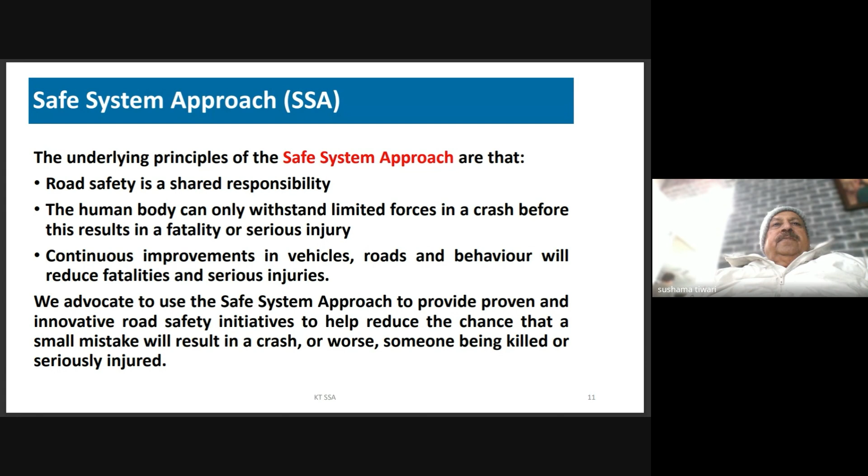So the purpose is that we want to provide road users layers of protection, in the form of safe roads, safe vehicles, safe speed, because people are fallible and vulnerable humans, in order to prevent deaths and serious injuries. Humans can make mistakes, they have a certain tolerance level, so we have to provide that, and that's why more and more emphasis is being given on high speed and high capacity roads.

They are providing double beam crash barriers, they are providing New Jersey type barriers. The main purpose is that if we identify sections where so many buses are falling into ditches, and if we provide these features, the buses will not fall into the ditches, and so many lives will be saved.

Speeding is another issue. In India we luckily have conspicuous marking tapes on vehicles, but many accidents take place where a truck or bus is parked on the side of the road, and speeding vehicles crash into them, and 4 or 5 people die.

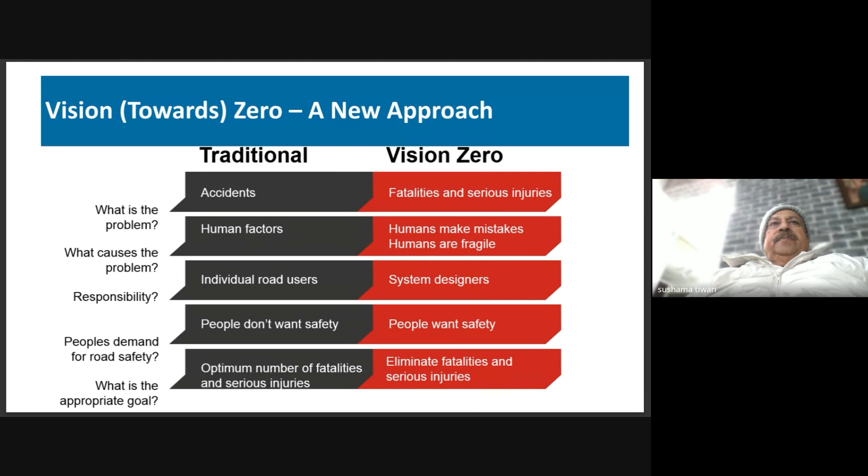So as I mentioned, those performance indicators at the global level. Next, please.

So these two performance indicators have been agreed, and our minister Mr. Gadkari has signed the Stockholm Declaration and in other forums, stating that all roads constructed in India will have a recognized standard, which will be 3-star. Similarly, when they improve existing roads, it should meet that 3-star standard, with 75% of roads meeting 3-star. And when they conduct road safety audits, they should keep in mind that all the features according to the 3-star levels should be there.

Next, please. So what works actually, based on detailed studies in many countries, WHO and World Bank have found that one measure is the most effective, which can reduce or prevent at least 30% of fatalities. As usual it's like common sense, but they have scientific and evidence-based data they have collected, and they've found that the first thing is a safe mode of transport, integrated public transport. That is very, very important.

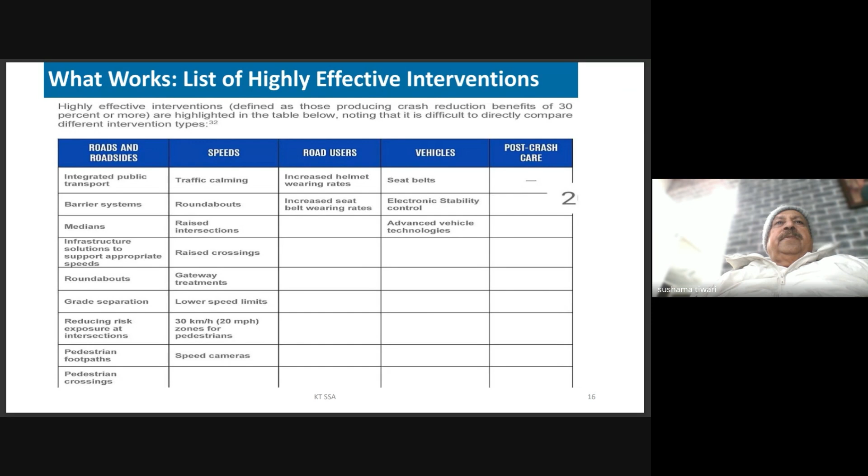Next, please. Another point, based on research, is that signs are one of the most effective measures, because as a road engineer, signs are what we use to warn drivers, to guide drivers, to regulate drivers. So signs and markings are very important, and among those, signs are especially important.

We inform the drivers, and they have found what is the benefit-cost ratio, because we cannot simply put any engineering solution or measure unless we have proven evidence and a favorable benefit-cost ratio. Next, please.

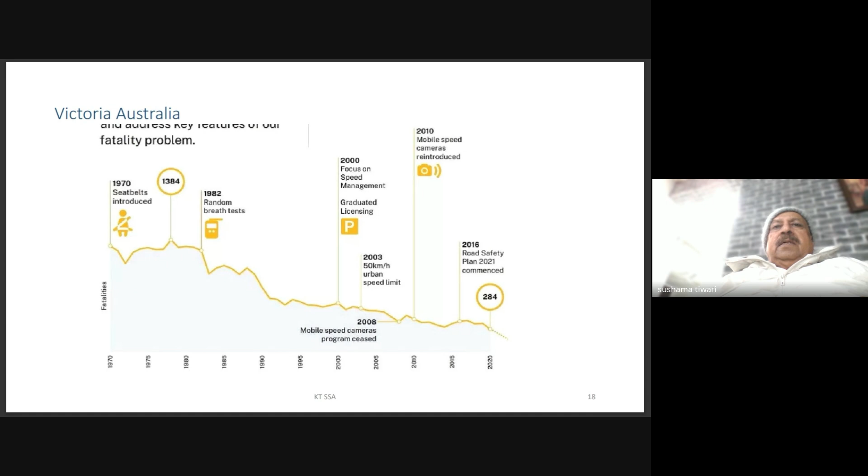Next please. One of the very important aspects is that in Australia, each and every state has a Minister of Road Safety with the Office of Road Safety, with professionals working on road safety. And then at the central government level also there is a Minister of Road Safety, which is totally missing in India, in spite of 15.3 lakh people dying in the last 10 years.

So they appoint cabinet level road safety ministers, review road safety strategies, commit to a minimum $3 billion for the road safety fund, set an extended vision zero target, establish and commit to key performance indicators, and implement rapidly proven vehicle safety technologies.

In Australia, more than 96% of vehicles are 5-star. So whenever anybody decides on any fleet vehicles, there is a condition that they should always be 5-star rated. And unfortunately, when the Scorpio Mahindra was introduced in Australia and tested, it was found to be 0-star. So it's very strict rules and regulations, and they follow it very seriously.

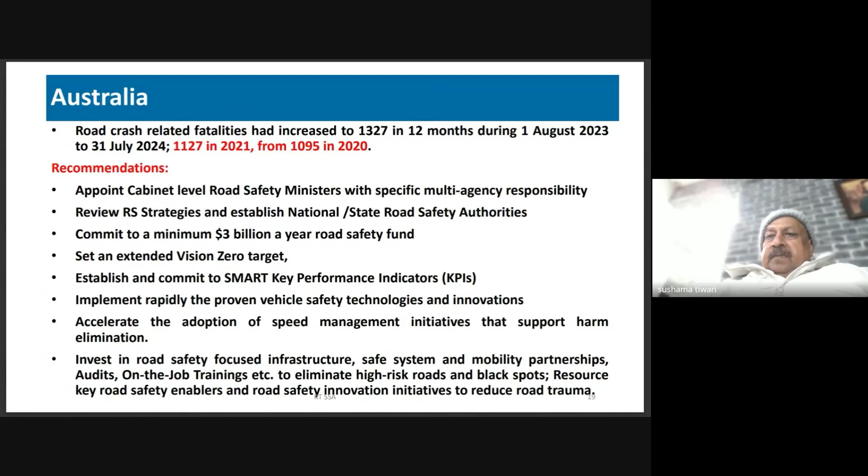Next, please. Again, the importance of safety - one is speed, which is unfortunately an issue when the super expressways were designed for Indian conditions. I don't know who did it or who advised that the design speed of the super expressway should be 150 kilometers per hour.

As you can see, 95% of our vehicles are 0 to 3 star. 30%, as admitted by our minister Mr. Gadkari, have no license, plus overloading, plus fatigued drivers, vehicle conditions. So with that, even a 120 kilometer per hour operating speed is very dangerous. That is the reason 72% of deaths are occurring on our roads.

So we have to realize that speed kills. On the Yamuna Expressway, somebody took a wise decision, and now they have reduced the speed from 100 to 75 kilometers per hour. And that too, the reason they have given is the fog.

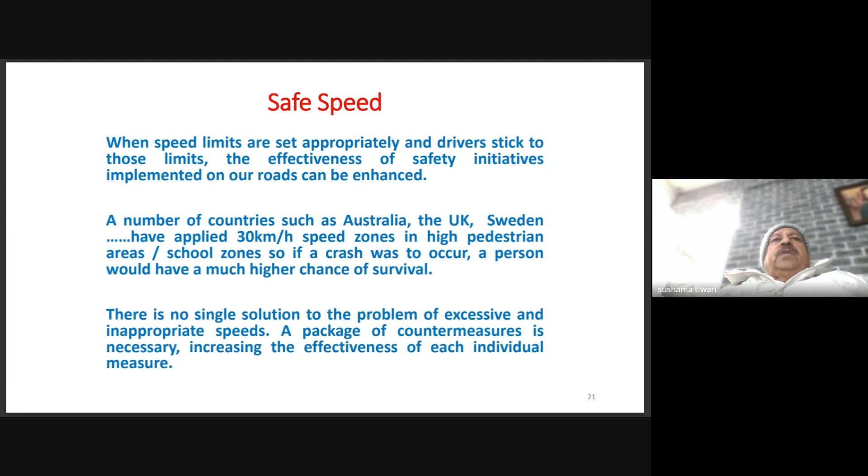Next please. So again, safe speed, as I mentioned, is very, very important, and all initiatives should be taken to reduce the speed of travel.

Next please. So again, there is a relationship: first is engineering, where roads are to be designed with all the safety features. Then there should be education, then enforcement, and then monitoring and evaluation. It's like a continuous process of before and after.

Next please. Road design, I think most of you are engineers, and there's a very important role for engineers here. Unfortunately, when I was teaching at Indore University or Roorkee University, I found that in the BE course, out of around 40 to 50 subjects, there was only one subject which was highway engineering. And in highway engineering, out of 12 chapters, only one chapter was traffic engineering. So most engineers, being more interested in analytical work, used to skip that one.

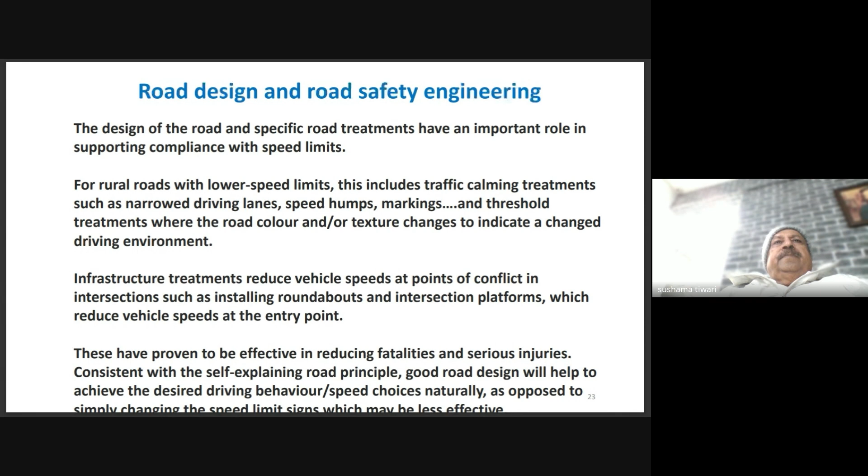So these are what we call traffic calming devices. As engineers, we can provide what we call the sleeping policeman. If we can provide these features, then we can actually do speed management. It consists of horizontal, vertical, lane narrowing, roadside development, which are self-enforcing physical or psycho-perception means to produce the desired effect.

Next please. So some examples are there, like a roundabout, raised pedestrian crossing, then using different colors to highlight markings on the pavement. Then putting lights sometimes, and for bus bay, putting bus lanes and bus bays in different colors of pavement. These are the different measures, and details are there in IRC 99, which deals with speed management devices.

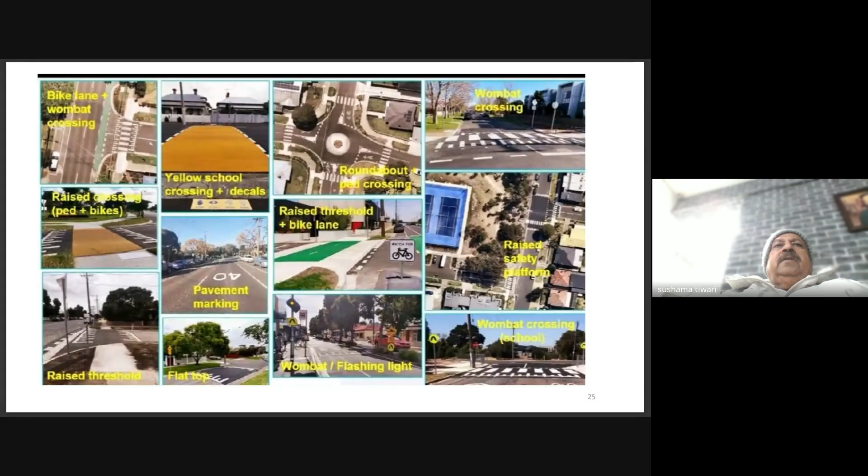Next please. So again, like you see raised speed humps and markings, this is what I designed at that time, which was 3.7 meters long, 10 centimeter height, and another one where buses and trucks are more in number, it was 5.5 meters, parabolic shape. Then signs, an advanced sign plus warning that you have to follow that speed hump. This is an Australian situation at 20 miles per hour.

If you go at higher speed... recently you might have read about that case in Dehradun where a girl's video became viral. She was on a scooty and totally lost control. I think there was another case where a car jumped. More than 5,000 people die in India only because of the wrong design of speed humps.

Even today, while working on a World Bank project in Gujarat, I saw they are still using the term speed bump in place of speed hump. Bump is a derogatory word, that's why we avoided it when we prepared IRC 99. But throughout Gujarat, you will still find signs that say speed bump.

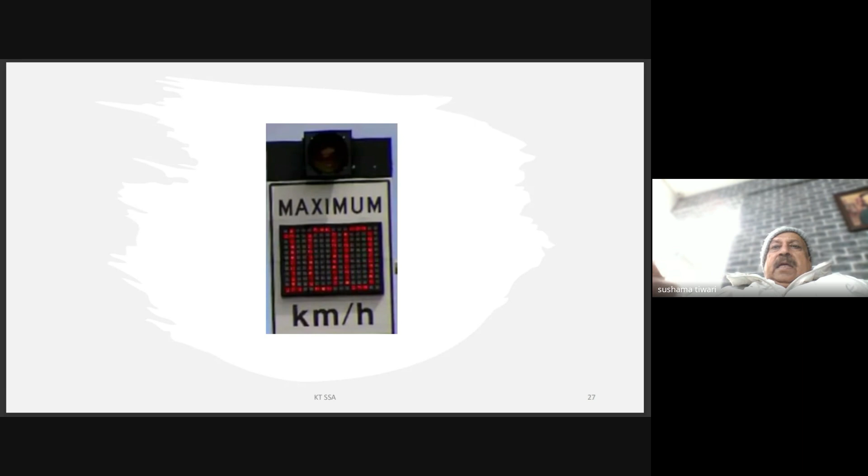Again, this is at school zones or other places. It is mounted with a camera, and the school speed limit is 30 kilometers per hour. If anybody goes beyond 30, photos are taken and the person is prosecuted. Whatever fund is raised is used for preparing and procuring more of these signs.

This is something I have not found in India, but I've been told it is now being introduced. This is what we call the dynamic speed sign. The same sign can have a speed limit ranging from 40 to 120, depending on traffic conditions and weather conditions — the same sign will show different speed limits. This is what we call the dynamic speed system, and it has to be introduced especially on all our high speed and high capacity routes.

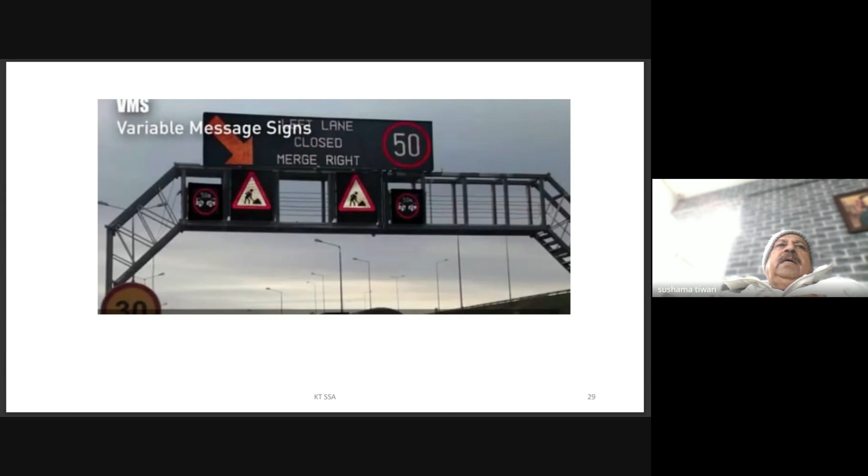Glare is an issue there, but most cars sold in Australia now have automatic sensors that can warn and dip the lights if someone is coming with a high beam. Anyone approaching from the front at about 500 meters to 1 kilometer will automatically have the lights lowered from high beam to low beam, so there is no glare. These features are very highly effective and cost effective, especially over long distances.

Next please. As I mentioned, education is very important. The risk of involvement in a fatal crash doubles with every 5 kilometer per hour increase in speed over the limit in a 60 kilometer zone. It's important to understand the significance of speed and how it impacts the number of casualties.

Another very important point: if you design a vehicle's operating speed at 80 kilometers per hour versus 120 km/h on a highway, more than 50% more fuel is consumed, and that means air pollution increases by more than 50%. So if anyone has an environmental background, this is the best and simplest way to reduce air pollution — just simply reduce the speed.

Simply reduce the imported fuel we are spending, because each and every vehicle is designed with the optimum fuel consumption of 70 to 80 kilometers per hour. So if we are going for more, anybody with a mechanical engineering background must understand that there is an optimum fuel consumption. Going for high speed, stopping sight distance increases.

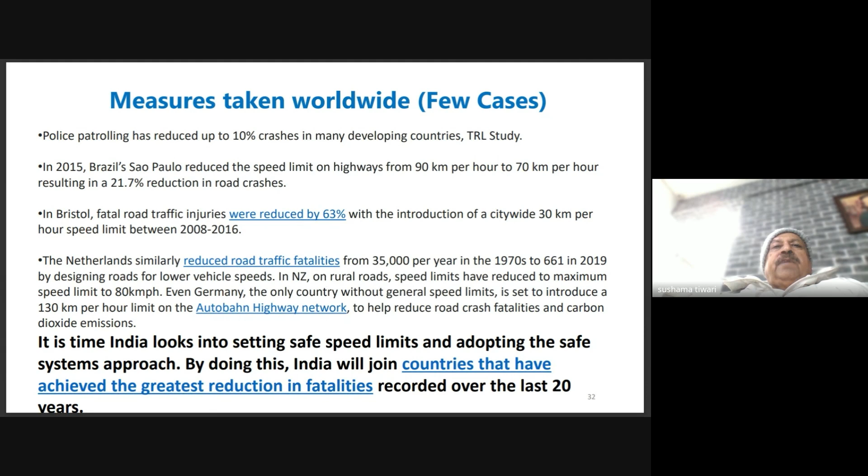And now the Autobahn, which is always given as an example in Germany, they have also reduced the speed limit to 130 kilometers per hour. So it is time for India to look into setting safe speed limits and adopting the safe system approach. By doing this, India will join the countries that have achieved the greatest reduction in fatalities recorded over the last 20 years.

Thank you. Be visible, be safe. Again, the loss and suffering associated with road traffic deaths and injuries are preventable.

As I mentioned, if you do the intervention properly, and we follow the safe system approach with some modification, because we cannot just copy what other countries have done, since we have mixed traffic conditions. We have many two-wheelers, but at the same time, like in Indonesia, they have segregated roads for two-wheelers. That type of situation we have to also create, as roads are not only for vehicles but also for human beings.